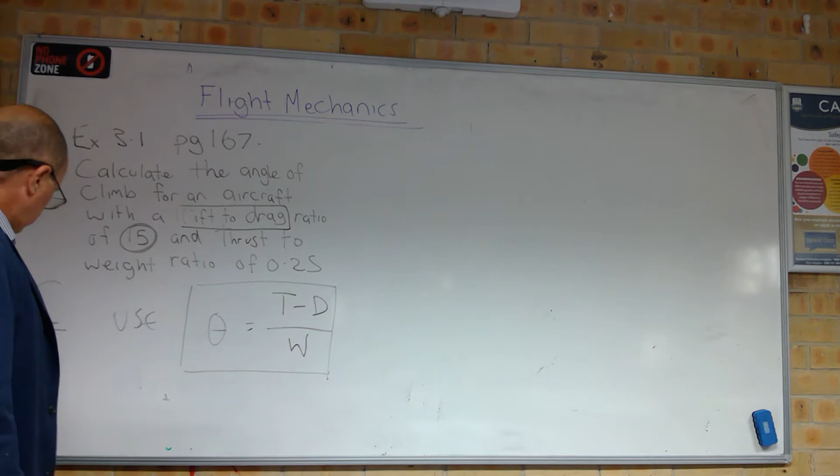So we have a lift to drag ratio of 15. L over D. A ratio is one thing divided by another thing, so if you have a high value for lift to drag, it means the aircraft glides efficiently. Gliders will have a high lift to drag ratio.

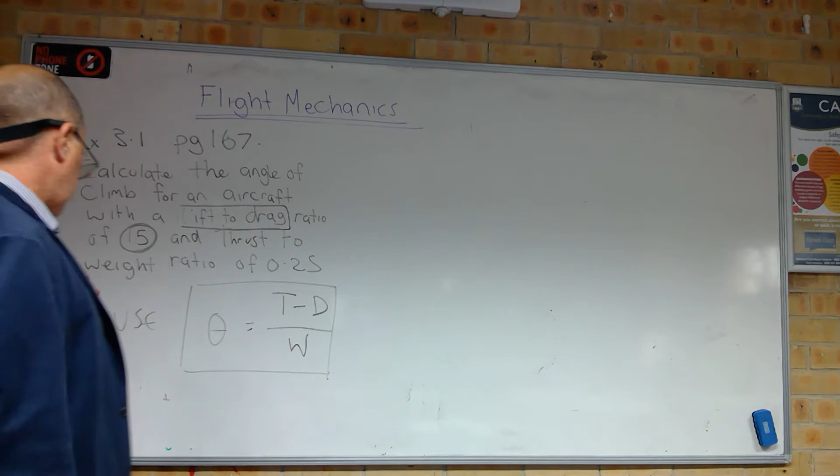And we have a thrust to weight ratio of 0.25 - so how much thrust for a given amount of weight for the aircraft. So they're the two things that you're given, and we're going to use this equation.

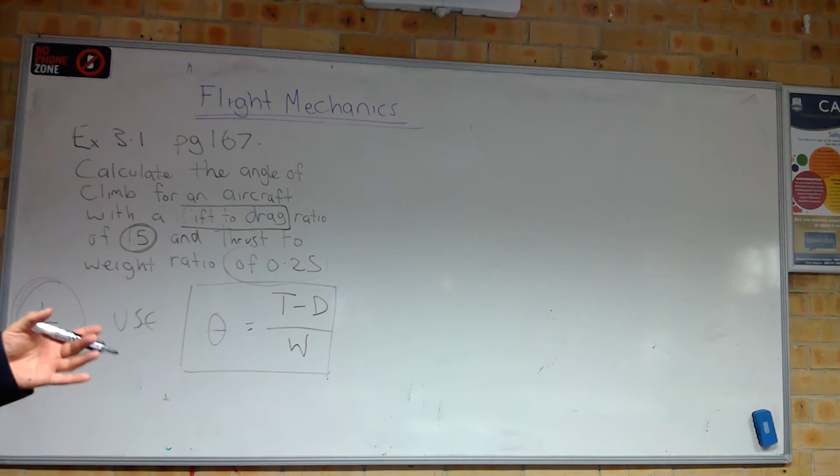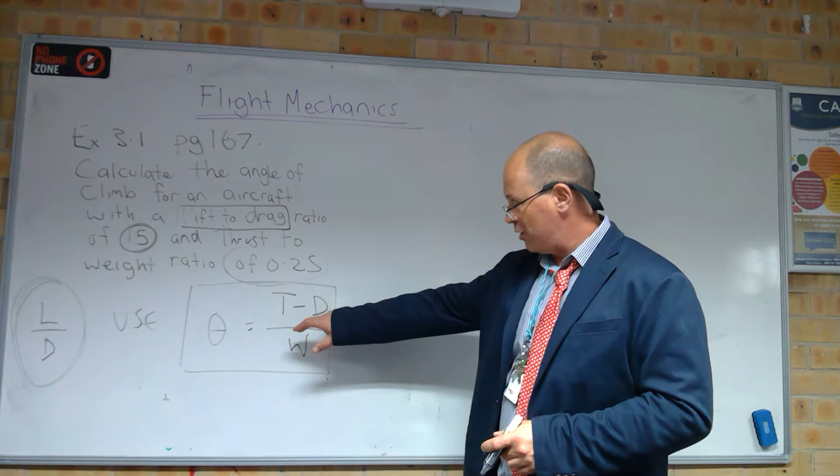Now you might be saying to yourself, we don't have a weight for this question, we don't have thrust, and we don't have drag. So obviously we need to do something with this equation. So what they've done for this example is they've gone theta is equal to thrust over weight minus drag over lift.

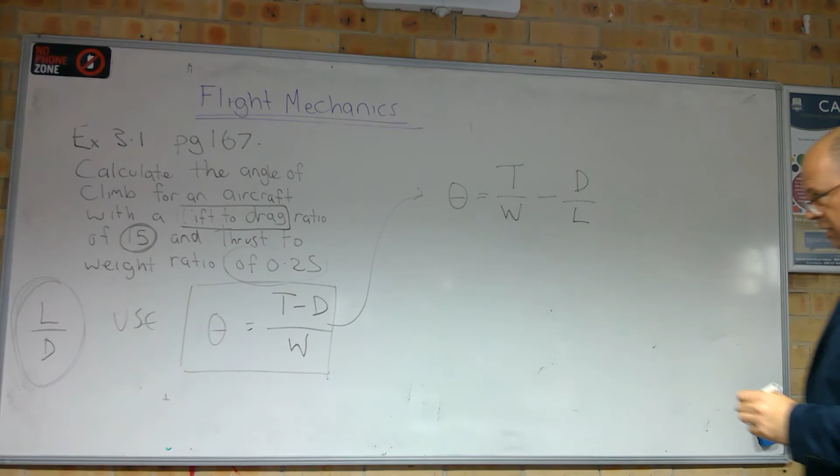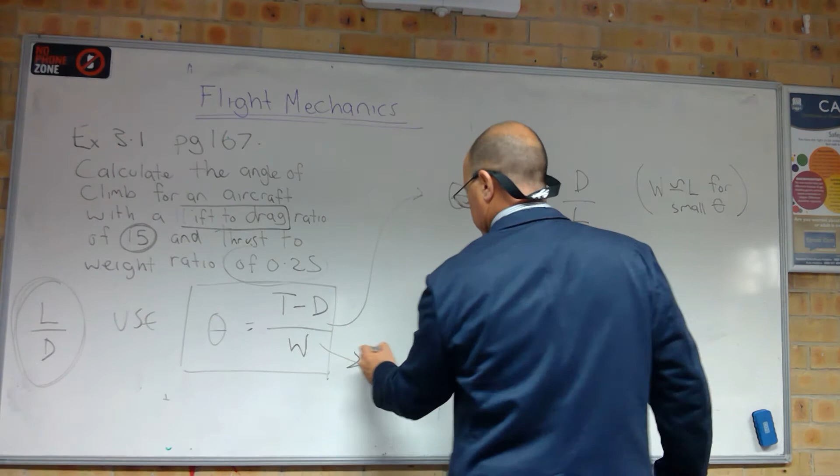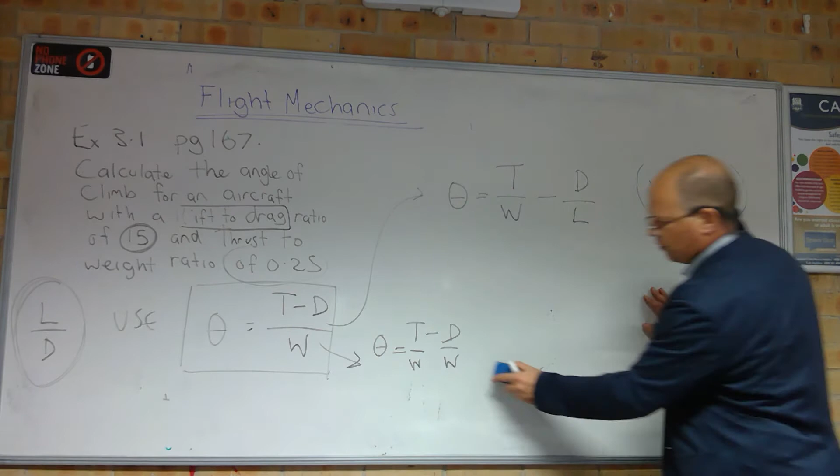Now you might be saying, how have they gotten to that equation? Well, we know from when we were deriving these equations that weight is approximately equal to lift for small theta. That's how we've gotten this equation to change to that value, because we've said that's approximately equal to that. Because this equation, if you wanted to rewrite it the long way, would be theta equals T over W minus D over W. So all they've done is they've crossed out one of those W's and turned it into an L.

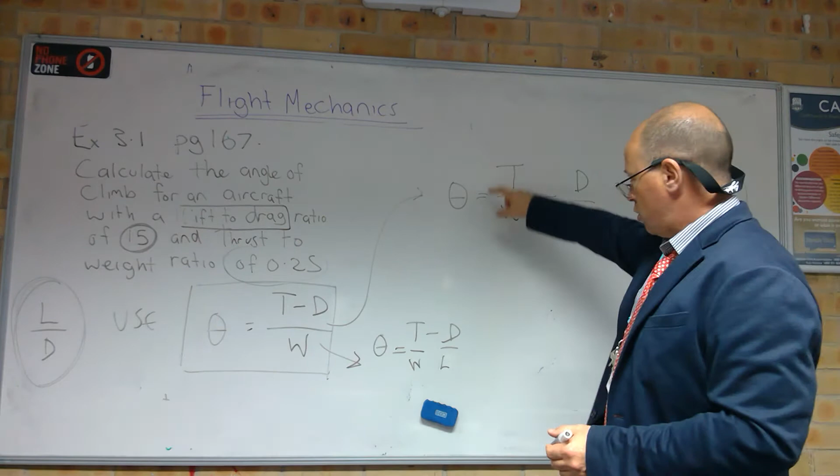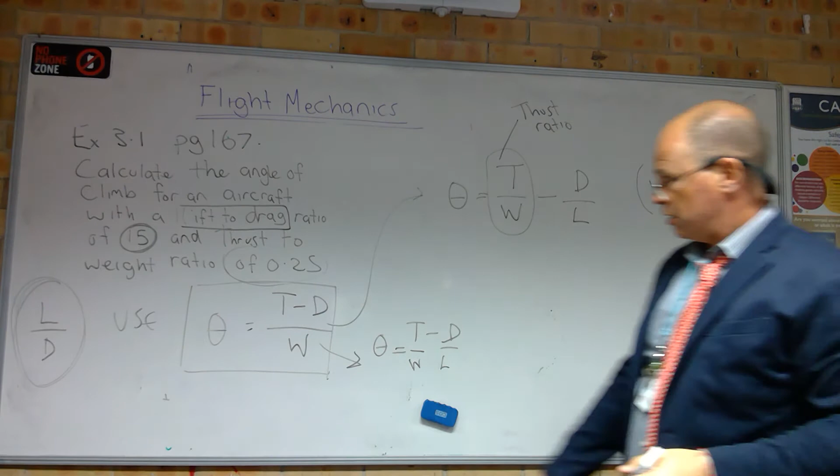That's how we've got to this point here. Are we all clear with that? I'm hoping we are. Okay, so now we've got T over W, which is thrust over weight, which is our thrust ratio, and we know that because we have a thrust to weight ratio of 0.25. So we can go theta is equal to 0.25, and then minus, now this is drag over lift.

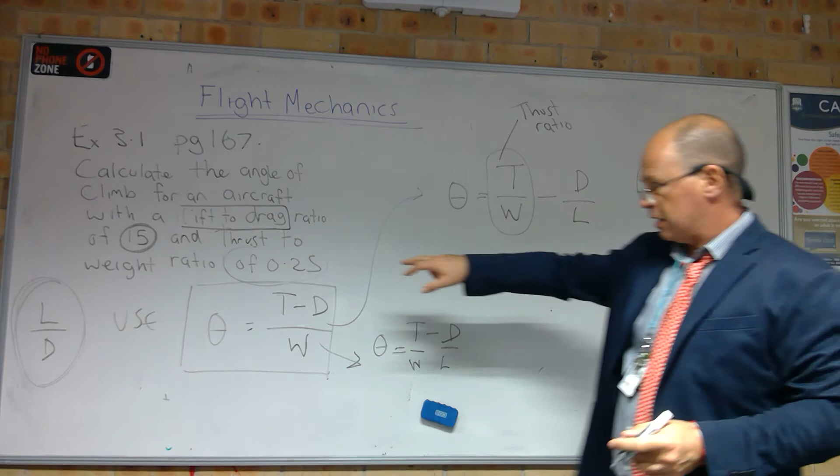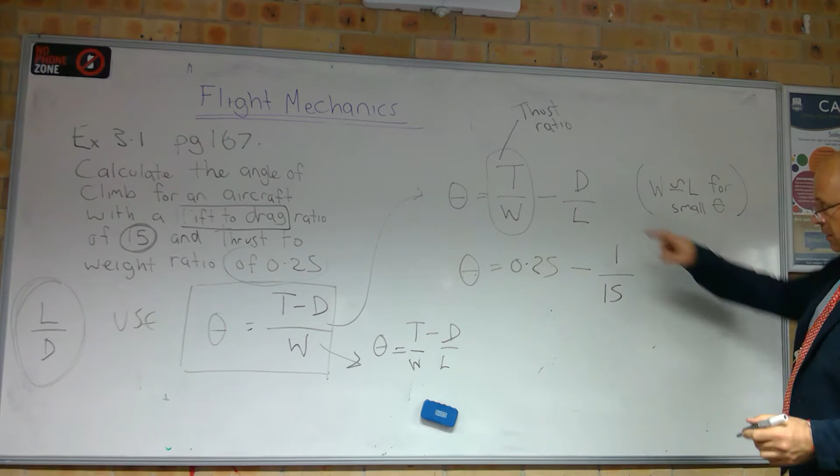We're given a lift to drag ratio - this is a drag to lift ratio. So if you were to flip this and find the reciprocal, it's like saying 1 over 15, because the reciprocal of this is lift over drag. So we have to take the reciprocal - we know that lift to drag is 15, so drag to lift is 1 over 15.

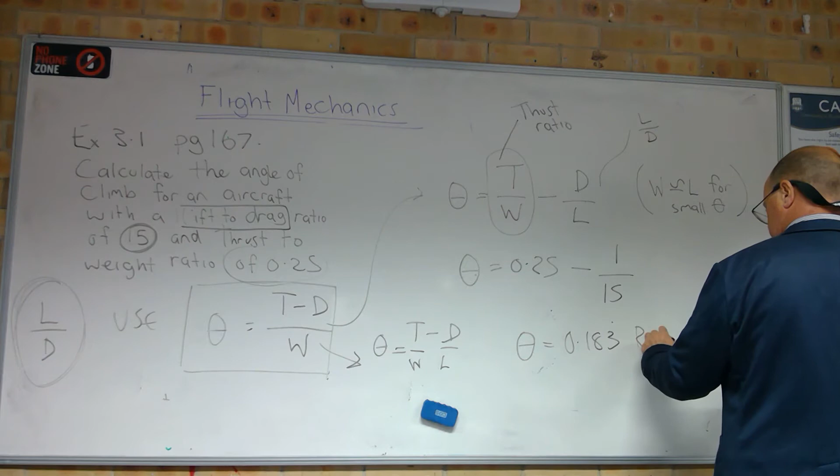Okay, so when you do the mathematics for that, you'll get a value of theta that's in radians. We get our scientific calculator out, and if we say 0.25 minus 1 divided by 15, and go equals, we end up with 0.183 repeater, radians. They might ask you for degrees.

It's probably better to convert it to degrees. So how do I convert that value to degrees? Well, we know it's in radians, so what you do is you just go shift and then push this answer button, the DRG, which stands for degrees, radians, and gradient, which we don't use that much.

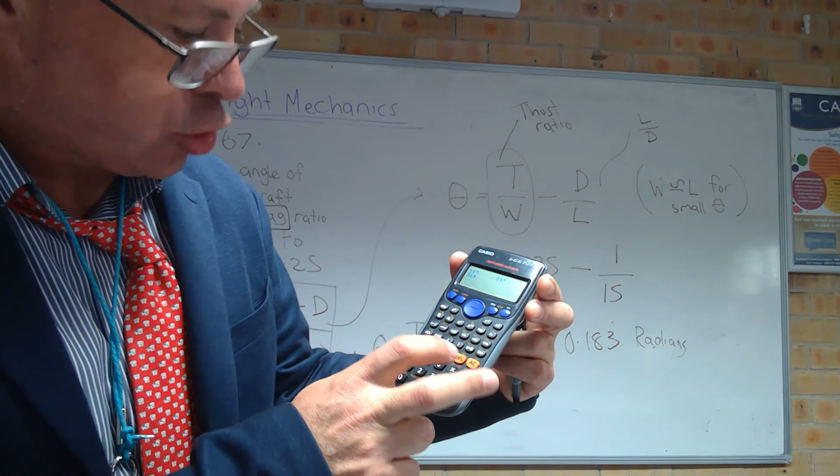And we hit that, and now it gives you the options - 1 is degrees, 2 is radians, 3 is gradient. But even though we were in degree mode, you'd think you'd hit 1 for degrees - you don't. You need to hit 2, because you're telling it that it's actually a radian value.

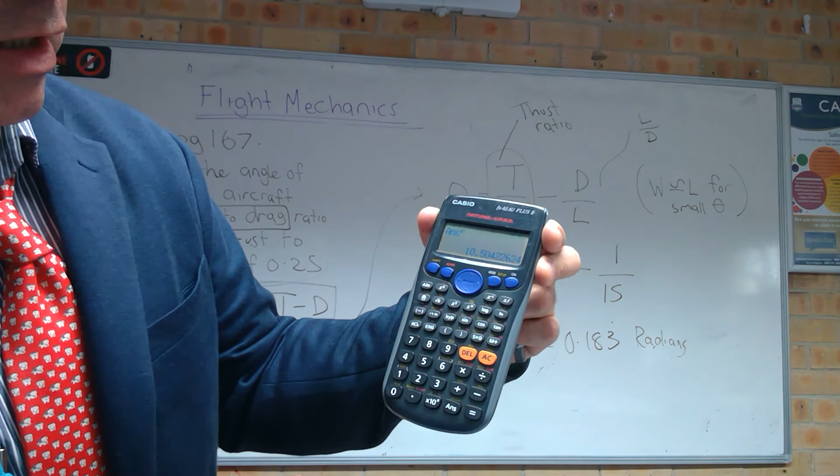And then you hit equals, and you end up with 10.5 degrees. And the book says 10.3, so I don't know how they got that - I think they rounded.

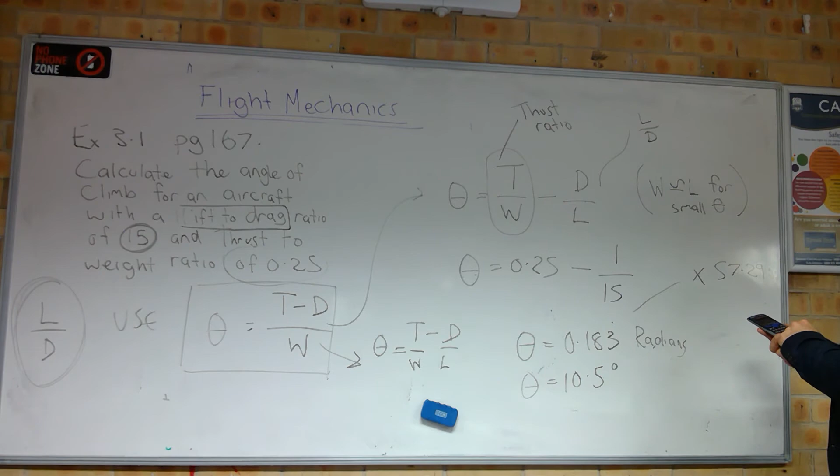So 10.5 degrees. The other way you could do it, if you want to remember that a radian is equal to 57.29 degrees, you could multiply by that. So if we took this as an approximation and went 0.183 times 57.29, we end up with 10.5 still. So good on you - I don't think it's 10.3.

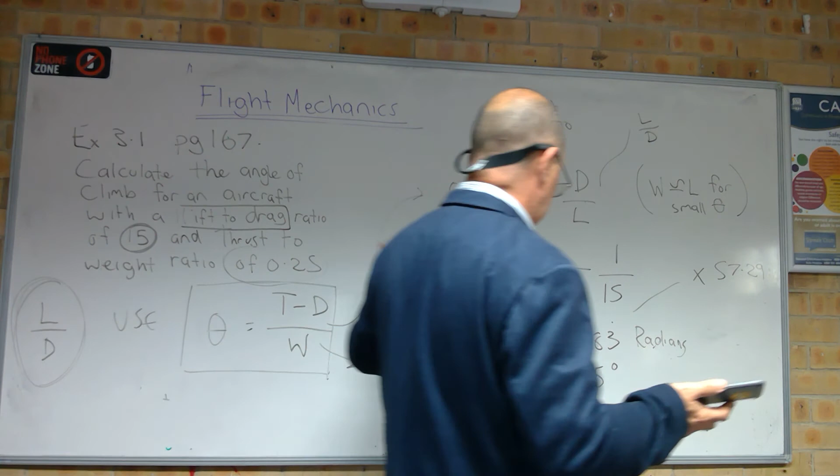So that is the answer. Theta is equal to 10.5, and they're the manipulations of the equation to get that example correct.

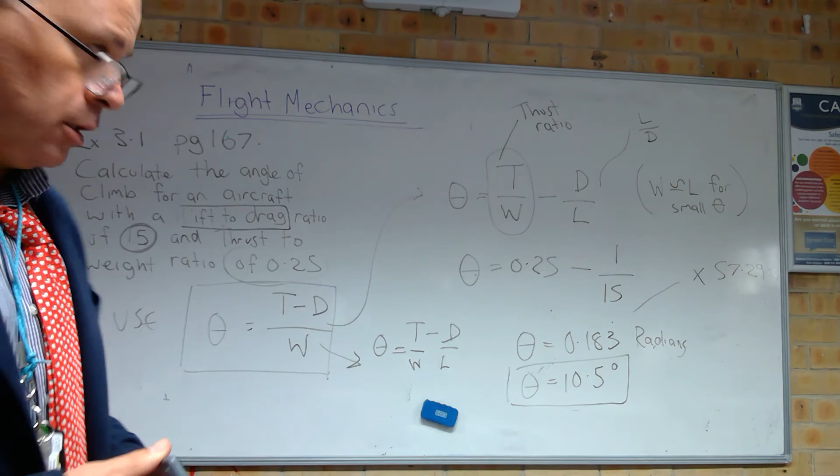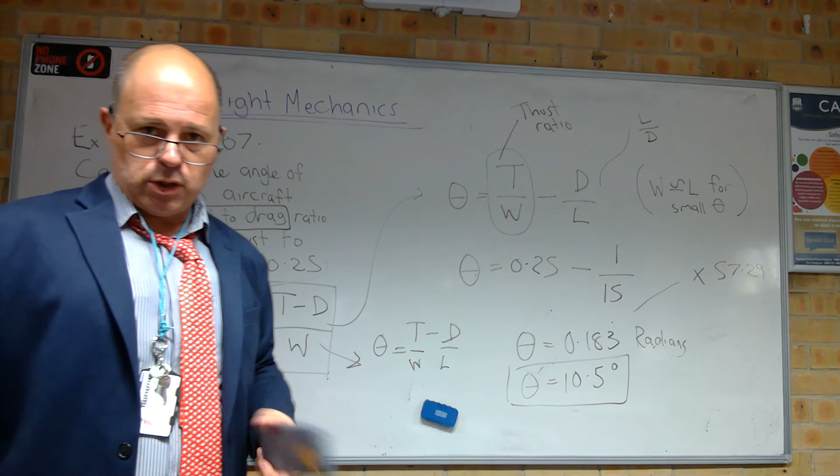You could play around with this question till the cows come home, change thrust, change lift to drag, etc - it's always going to be the same type of question. Now we'll do the next question in another video.